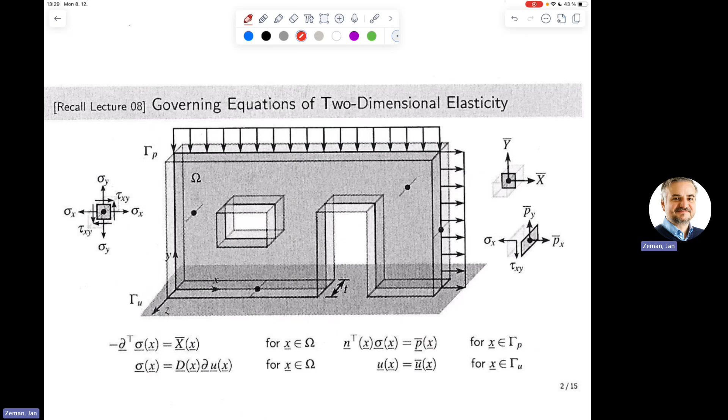Basically what Marek was trying to show you is how to get the governing equations of two-dimensional elasticity and treat it using the tricks we developed in 1D elasticity, for instance for stress elements. I will spend tons of time on that, just to make this distinction.

Basically you proceed by taking this set of governing equations, which, non-standardly I would say, I'm presenting separately, so we don't have a diagram. I will now distinguish two types of equations: one is the equations of equilibrium, and the other is the rest. This is because the equations of equilibrium are replaced by this principle of virtual work, whereas the rest is left untouched. So this is the first development.

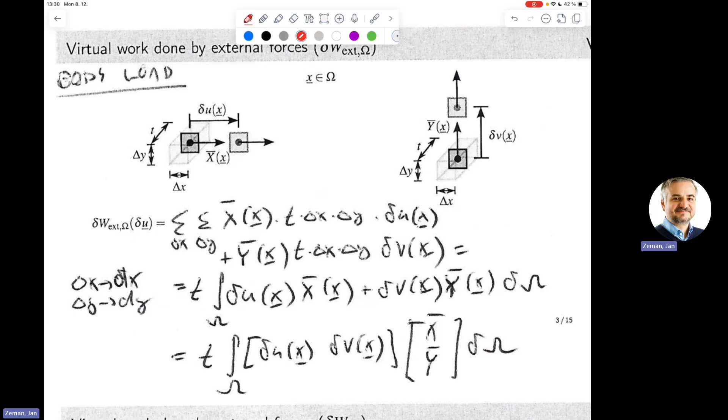Then Marek was trying to explain to you how this virtual work done by external forces looks like. What I prepared, and what we also try to explain, is that the procedure is always the same, because this is work. You always need to take your quantities of interest and convert them to something which has the units of work, which is force times displacement, or if I have rotary effects, as I will have for plates, this is moment times rotation. But in this version, force times displacement makes perfect sense.

So what I'm basically doing here is taking the distributed load and converting it into a resultant force, which is in Newtons, because this is the intensity of the distributed load, given in Newtons per cubic meter. I will multiply it by the corresponding volume with this representative section, which is delta x times delta y in the in-plane dimensions, multiplied by the thickness, which is assumed the same everywhere for simplicity but can be generalized. I need to multiply it by the displacement, in meters, and hence I get the work.

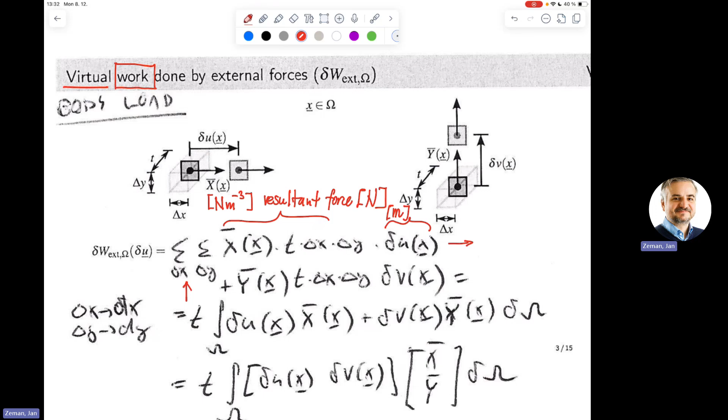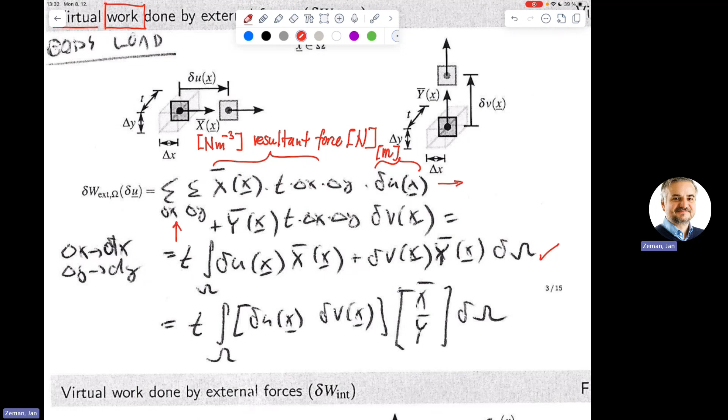Now this argument is relatively straightforward. This is for the x direction, this is for the y direction, and finally I need to sum the contribution of these elementary volumes, these elementary pieces together, which gives rise to integration. This is what Marek was showing, or I was also showing you on this slide. He also showed you how this can be reformulated using matrix notation, because this is something I have already denoted as delta U as a function of X transposed in the previous lecture. And here I also have this X over bar under bar as a function of X.

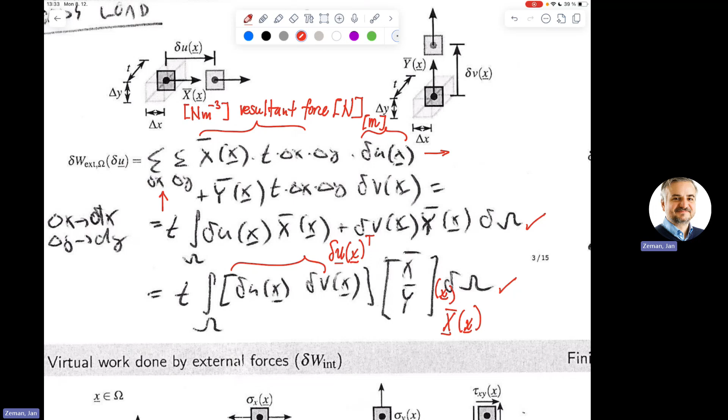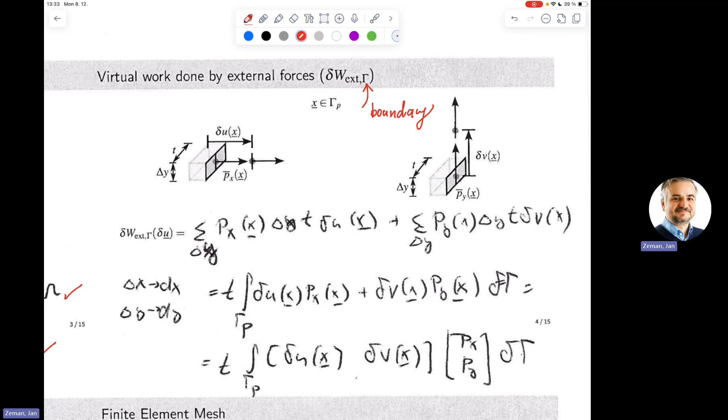Now one will see the same argument repeated over and over again, because now we are talking about the forces associated with the boundary. I will just do exactly the same recipe. The only difference is that these forces here are no longer volume forces, but surface forces, or in the jargon of elasticity, so-called tractions, and their intensity is given in Newtons per square meter, this highlighted square meter.

So this is the part of the boundary. This is how these quantities differ. Previously, these were body forces, hence associated with volume. Now these are surface forces, hence their intensity is associated with surface.

That's pretty much the end of the story, because now I will again take these tractions, which are assumed to be constantly distributed over this outer surface, since delta y is assumed very, very small. I will take the force here and multiply it by the corresponding surface on which it acts. I can denote this as delta fx, for instance, to make sure this gets converted to force, and I multiply by the corresponding displacement, in both the horizontal and vertical sense. So here again I can imagine this same elementary resultant making virtual work on the virtual vertical displacements of the boundary.

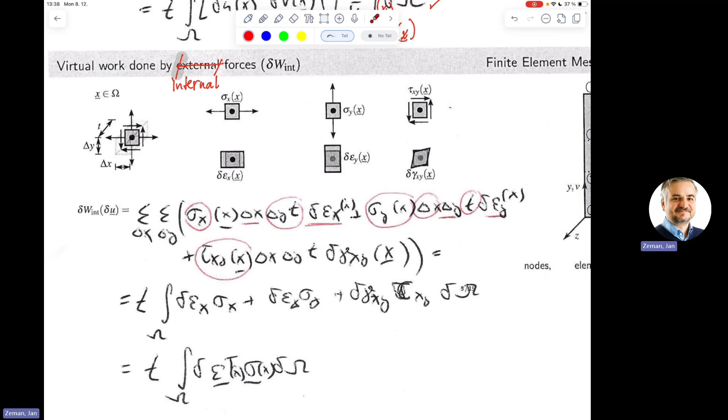And again, I just need to invoke exactly the same argument as before, or a similar one, because what I need to do here, for instance, is take this sigma x, convert it to the internal force, which means I need to multiply it by this cross-section, because this is the cross-section on which this stress eventually works. This is what is denoted here as this thickness, multiplied by delta y. So this is the first component.

So this is something like normal force in one-dimensional elasticity, specifically trying to explain in as much detail as possible. And actually this delta epsilon x times delta x corresponds to some change of displacement, roughly. So this is just this one-dimensional argument repeated there.

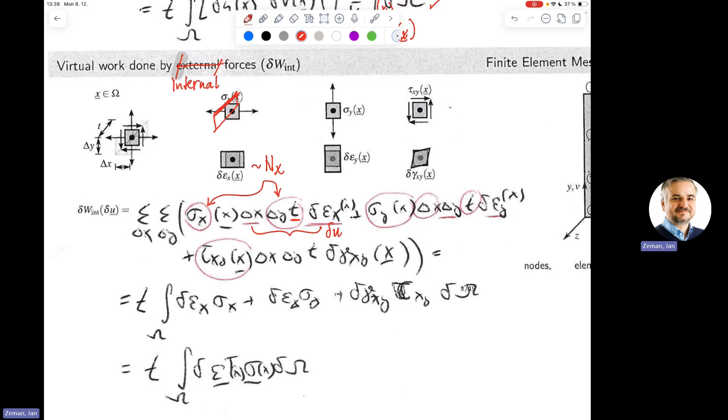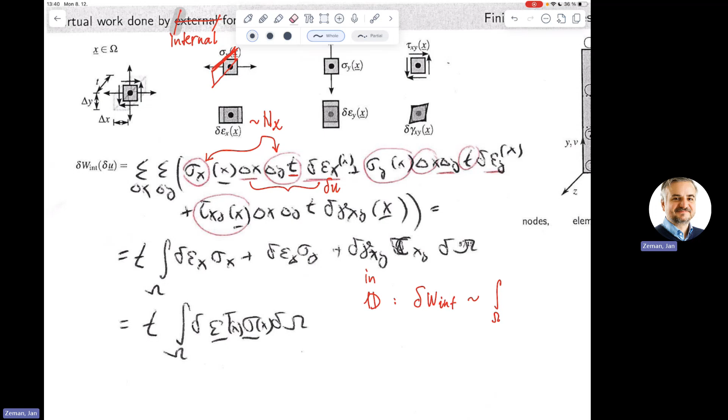So this is just the application of the claim that in 1D, the virtual work done by internal forces corresponds to an integral over the center line, where I have this virtual strain multiplying the normal force, dx. This holds for one-dimensional elasticity, and here I'm using this argument for this component of the normal stress, where it's just a one-to-one copy, except that I need to again take into account the cross-section on which this works.

If I just do it in the perpendicular direction here, this is what I get. So if you follow the same argument, it turns out that these two things change roles, but eventually, because you're multiplying things together, the order doesn't matter. So this is just the same example. And this one, by analogy, can be discussed in a slightly more involved way, but eventually goes to the very same expression.

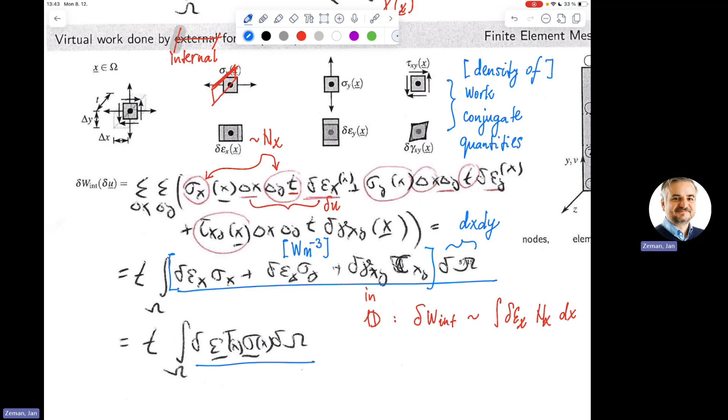And again, Marek was trying to show you that you can represent it using this compact notation, using the symbols from the previous slide. That was the next slide.

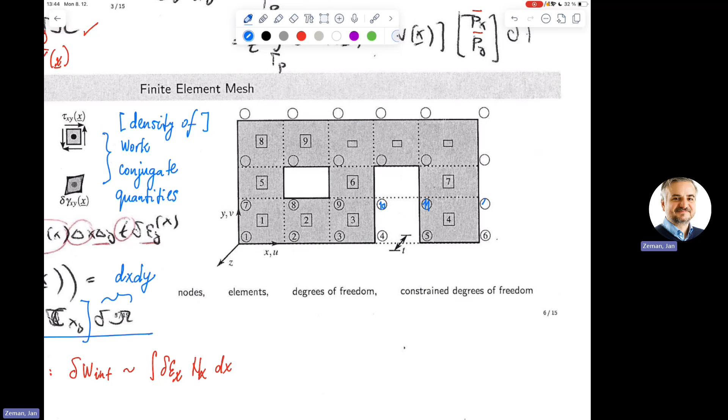Then this one is really something which goes in the direction I promised, because now I have my virtual work statement ready. So what I can do is take my structure, this load-bearing wall which I indicated, and what Marek was trying to show you is that if you count the numbers of your nodes and elements, what you find out is, if I zoom in, I have 4 rows of nodes and 6 columns. In this case, if I decompose the structure into smaller bits, these so-called finite elements, then I will have 24 nodes.

When it comes to counting, this is 10, 11, and 12. Degrees of freedom: each node has 2 degrees of freedom in plane, so this has 48 degrees of freedom, out of which some are constrained, because in that scheme I tried to give you, this was fixed.

So because nodes 1, 2, 3, 4, 5, and 6 are constrained, I do not need to determine the displacements of those - I know that from the very beginning. Of course, there's no free lunch on getting reactions there. The reactions which I identify with, for instance, to check our foundation, to check whether they can sustain this.

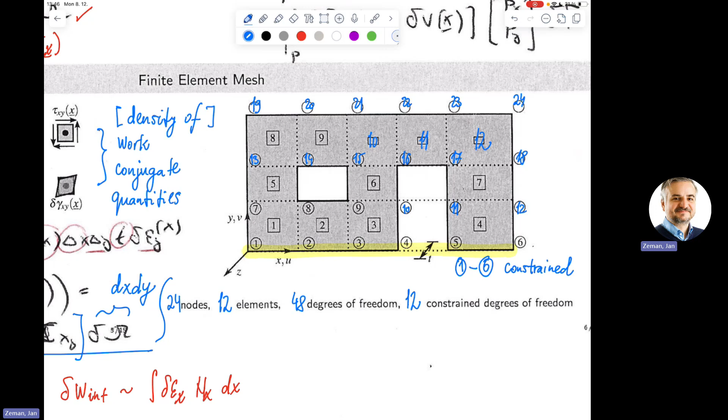So this is basically it. What this tells me is that if I'm able to treat this constituting element, this rectangle, with the same techniques as before, I can eventually see this as some kind of very generalized truss structure which has 24 nodes. And these elements serve somehow to actually determine the stiffness of that structure.

So that's basically it. If we are able to formulate all the matrices in the spirit of the displacement method, then this 2D elasticity can be converted to some 2D truss structure, if you would like to motivate it via this, and we know how to solve two-dimensional structures. We've done this semester 2 to 3 times, and last semester as well, so we know all the tricks of the trade. Again, this is not something which is super difficult.

So the question is why this method was not used before, and as you may guess, the answer is these numbers. Although this is a very rough discretization into so-called finite elements, it turns out you have 36 unknowns. Even for this very simple model of your structure, you need to solve a simultaneous system of 36 equations for 36 unknowns, and this is something no human can do. I believe this method was known before because people were very advanced in the pre-computer era, but it eventually resulted in something unsolvable. The thing which changed that was the invention of computers - they can solve 36 equations for 36 unknowns using well-established algorithms, and it costs you nothing.

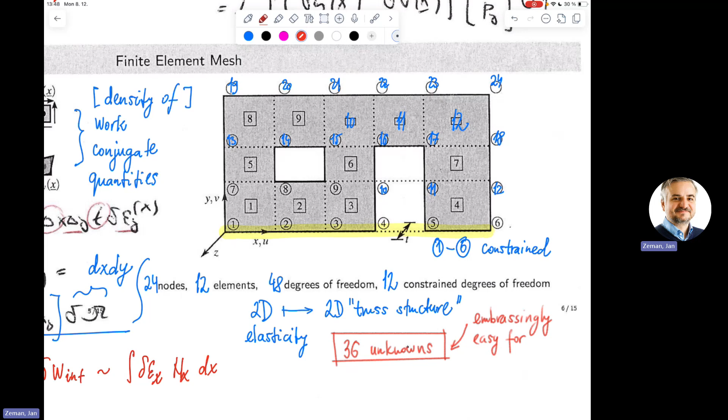So again, the reason I'm showing you all this is because we have computers at our disposal. This is something which is embarrassingly easy for a computer, but completely impossible for a human being.

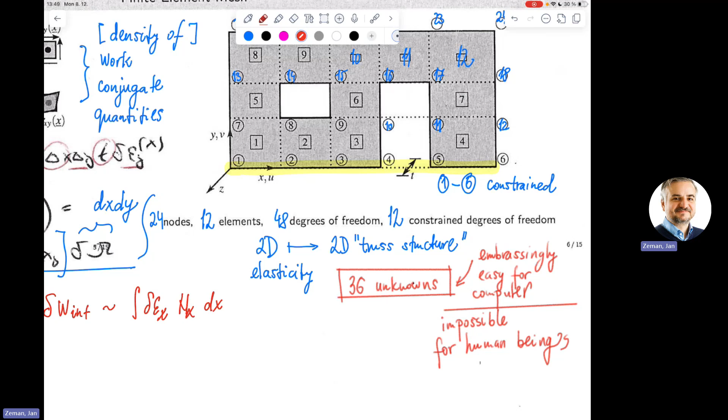So let's see how far this can be pushed with the modern recent development of artificial intelligence. Again, in this field, the invention of computers changed pretty much everything. It changed the focus of the methods from something analytical to something which, if you can convert to a system of linear equations, you can eventually use. And the tools of the trade and procedures of analysis are exactly the same as before.

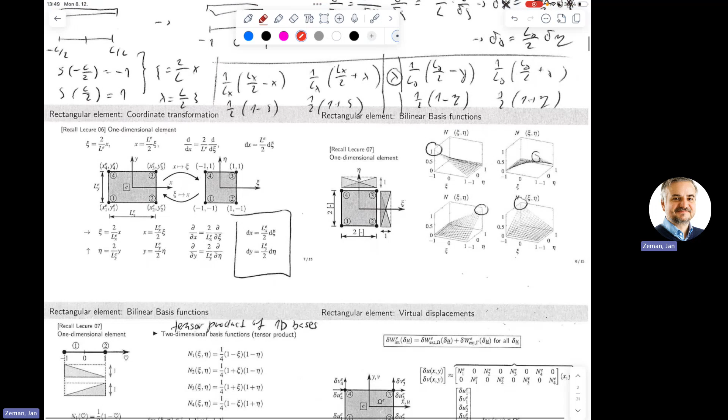Okay, so now what I need to do is evaluate these individual matrices. I need to know, if I would like to proceed exactly in the same way as I did for trusses, is get the stiffness matrix and get the rules how to transform distributed loads to nodes in order to assemble the final system equations. And once the system of equations is there, then I know exactly what to do. Of course, there is no free lunch.

The problem is that now I'm working with two-dimensional domains. I need to differentiate with two coordinates. I did my best to explain why this is so.

I also introduced one trick called Gauss integration, because when it comes to computing integrals, I told you last time that this is something I will never ever do analytically again. In all fairness, this can be done analytically at least to a certain extent, but the last part of this place is something that, at least 2 years ago, MATLAB was unable to do.

So to circumvent that, I need to be able to transform everything by this normalized interval, which in one-dimensional was just this one. But because I'm working in 2D, I also need to consider this perpendicular direction. So this is now my generalization of this one-dimensional interval. This is a two-dimensional interval, and I just need to be able to do the substitutions of variables.

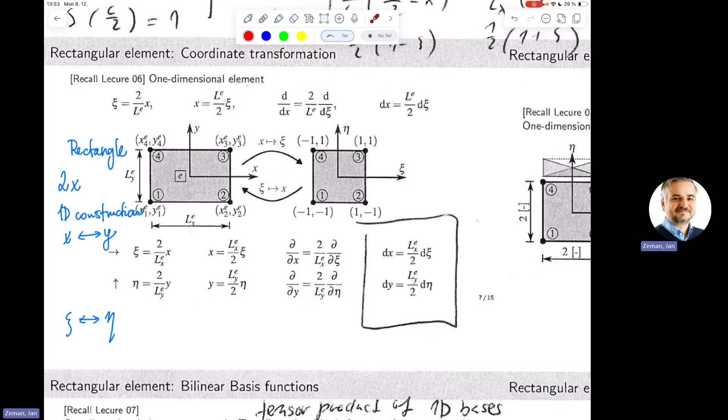So this is something which is 1D. This is something which is rotated 1D, which means that x is replaced by y, xi is replaced by eta, or any other symbol you wish. And again, because I have this square, which is always the case, by the way, the reference domain, then I can actually compute these basis functions as products of the one-dimensional ones.

So this is what I wanted to show here. This is again a recap of one-dimensional element development. This is exactly what I did in 1D. The only difference is that I'm saying that now this is an arbitrary coordinate.

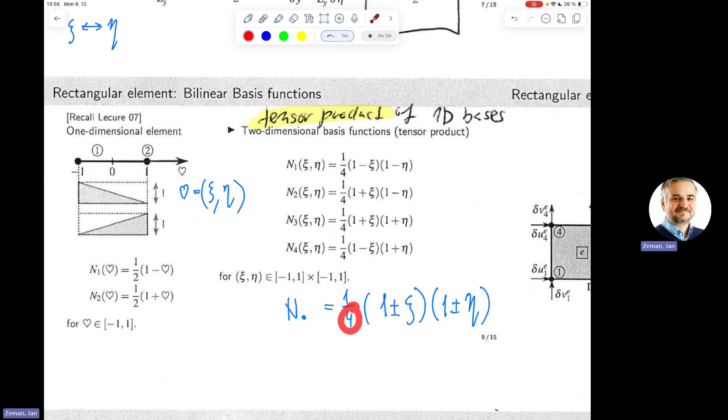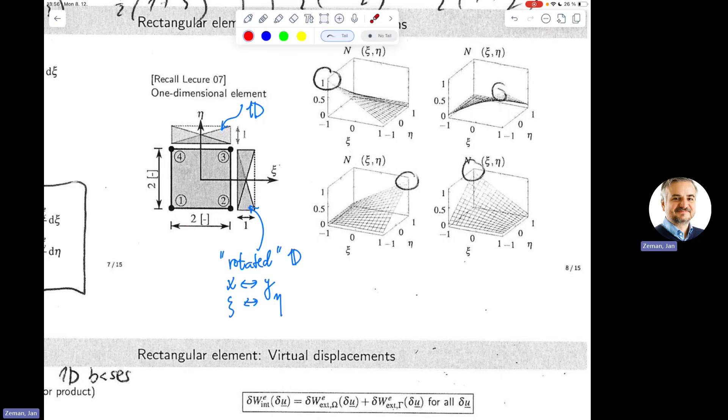This normalization factor of 1/4 is just to ensure that the basis functions attain the value of 1, as shown on this picture, which is still not perfect but much better than everything I presented so far. I never know how to rotate it in a way that's visible in all cases. This comes from the fact that Gauss quadrature is usually defined on an interval of dimension 2, so I just need to normalize, because we're basically doing this on a 2 by 2 square. But this is just a technicality.

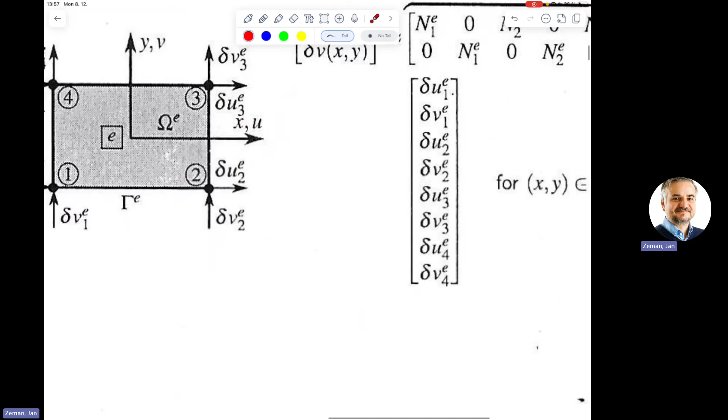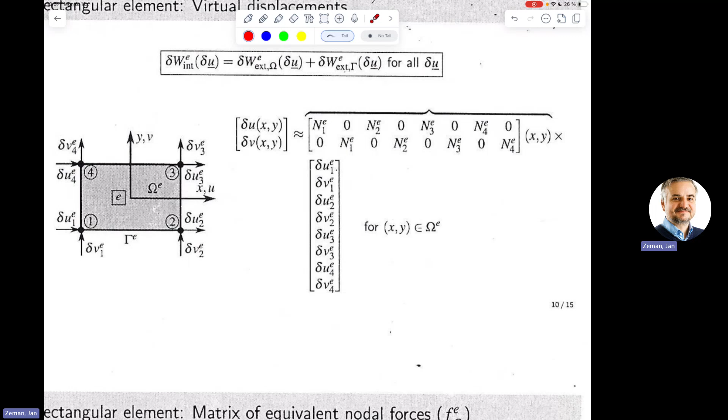So that's it. And now comes, depending on whether you've seen this before or not, what I'm trying to do is recall this principle of virtual work statement.

I'll write this, but only at the level of my element omega e. And I know that if I go through the procedure, from the term on the left-hand side I will get my stiffness matrix, whereas for the term on the right-hand side, I will get some vectors of equivalent forces.

This is what I did previously, but here the difference is that I have two types of distributed forces: ones distributed over the surface or boundary, and ones present in the body, like gravitational force. So this is something I need to distinguish, making two separate recipes.

But here I have two independent degrees of freedom which characterize this virtual displacement. So what I'm trying to do is express this virtual work done by internal and external forces, if I take one element within my structure and prescribe virtual displacements to its nodes.

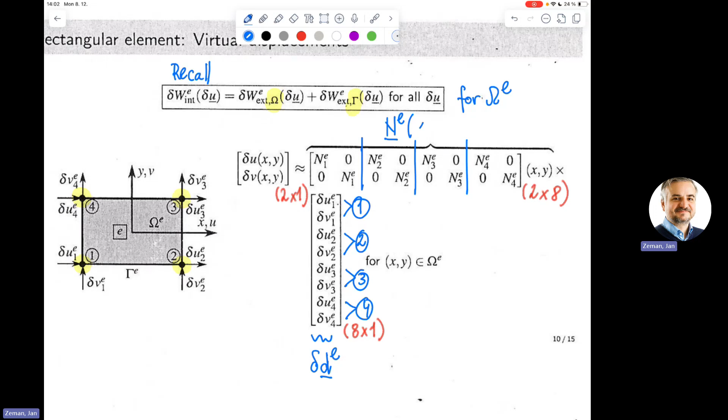In terms of compressed notation, this is the virtual work done by, these are the parameters of the virtual displacement - these eight numbers. This is denoted as the matrix of basis or shape functions, as Mark told you, and has this particular dimension. So my virtual displacement as a function of x and y is approximated by my matrix of basis functions, which depend on x and y, multiplying delta dE, where I'd like to highlight that these are data at the vertices of my element, so this is constant.

So this is something which is in R, this is something which is a column which is 8 by 1. So this is constant.

So if something is constant, this is something which is actually unaffected by integration, or very easy to integrate, so this is something which is quite good.

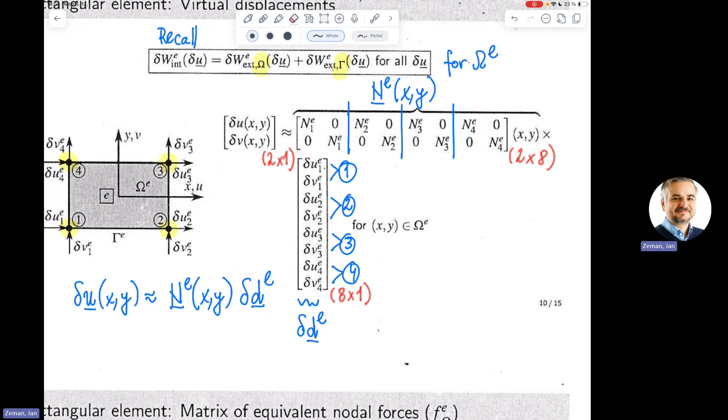Also, some people explain this finite element method as not really taking these elementary bits, but taking the elements of finite size. In my opinion, this terminology is not natural, because it was improperly translated. Actually, in English, it's different. But anyway, sorry, I'm talking about things I shouldn't be.

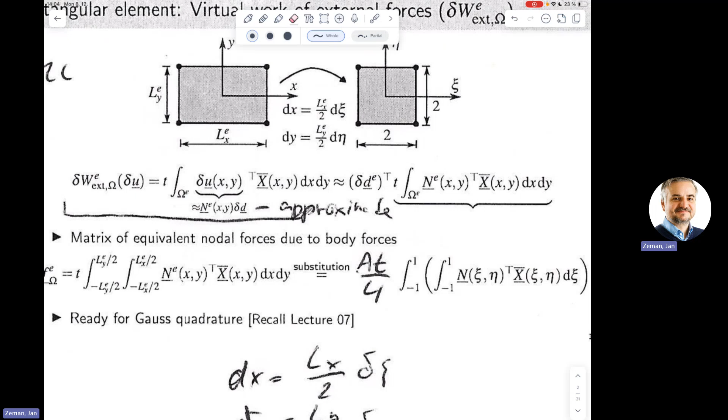So now, here is basically the argument. So now if I look at my element and try to compute what is the work done by external forces, by body forces in particular, I know from the previous one that this is given by this expression, but now I'm just integrating things only over my element, not over some arbitrary body, but my very specific element.

And if I do this transformation to the coordinate system in the dimensionless coordinates, this is actually something which is completely element independent. So the mental picture then is that I have these multiple elements within my structure, and they're all mapped to one finite element, 2 by 2. And this is what I believe is the proper interpretation of the finite element method.

So this is the finite element, and then by these substitution formulas and coordinate transformation formulas, just specializing for particular elements in your basic setup.

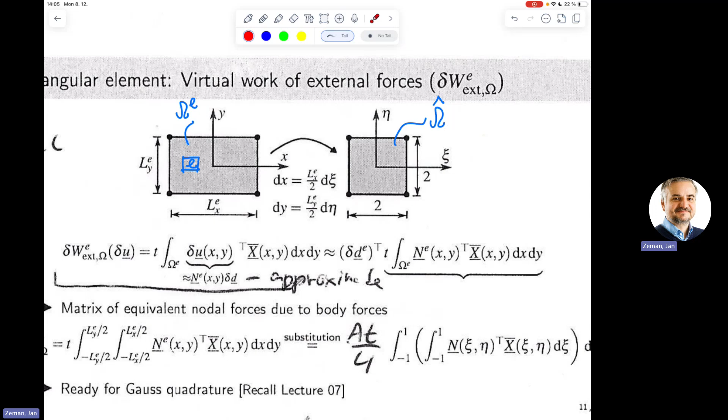So now what I will do is that on the previous slide I have justified that instead of virtual displacement, I can substitute the virtual displacement by this expression, where I forgot this E superscript.

And then I just use the rule which says that if I have a product with two matrices and transpose them, that actually everything gets transposed. So I know that if I just do the substitution, then this needs to be transposed, meaning that I will get this term, that term, this term, that term.

This thickness is just taken out of the argument because this is constant in the same way as the displacement. And if I do that in this way, then I have expressed my work done by external forces within this approximation.

As a matrix multiplication of this delta d E, which is the virtual displacement at nodes, times some matrix. And this matrix, as I know from the 1D case, is my matrix of equivalent nodal forces.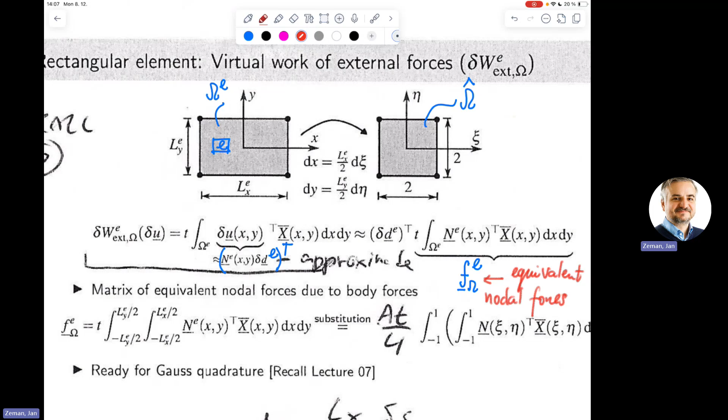But for that reason, I need to transform it to this reference domain, so to this omega hat. So what I will eventually get is that because of the substitution formula, this gives rise to Lx times Ly over 4, where this A times t is the volume of my element, so this V is my volume.

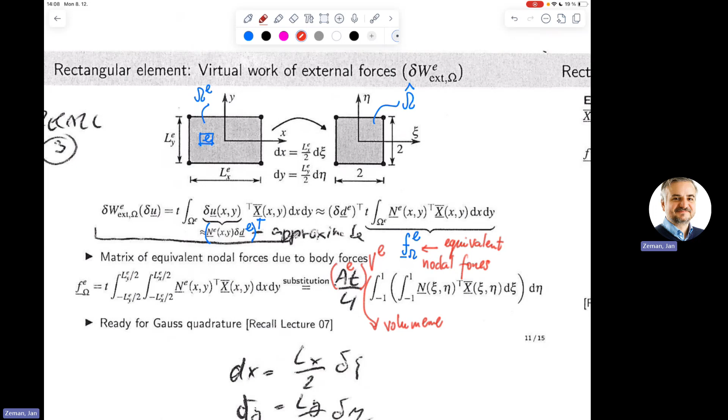And this is the remaining part, which is now to be integrated, but it's now transformed to this minus 1 to 1 integral twice, so now I can employ the Gauss quadrature.

And just as an illustration of how this works, if I assume, for instance, that the intensity of body loads is constant everywhere, then I can just run some analysis, documented here, to find out that actually this depends on the zeroth polynomial of xi and eta.

This is at most of the first term. So if you recall how this Gauss formula worked, if I'm supposed to be... here actually I need to do it twice, so I need to integrate with respect to both coordinates.

Because there is no summation, I'm just evaluating this at one point, so I can say that the only thing I need to do is take this quantity and substitute it in. I just need to be careful because I also have these integration weights, which are equal to 2 and 2, and hence this 4 vanishes.

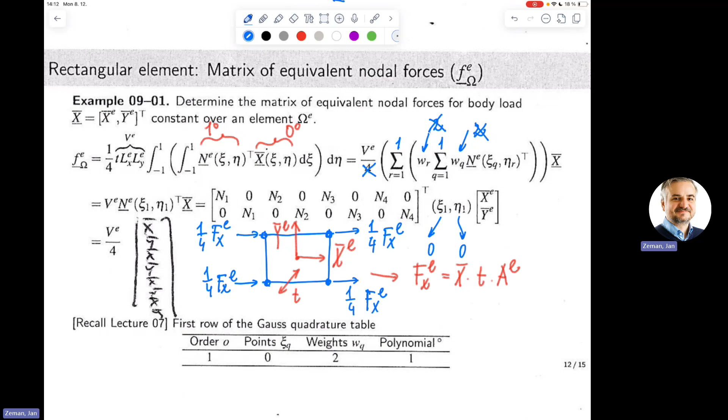Now there is this argument of the virtual work done by external forces, which was not really prepared well from my side, but after preparing these handouts, I realized that the most straightforward argument, demonstrated by this computation, is that if I'm locating the edges of my structure, I'm actually exactly recovering these 1D basis functions.

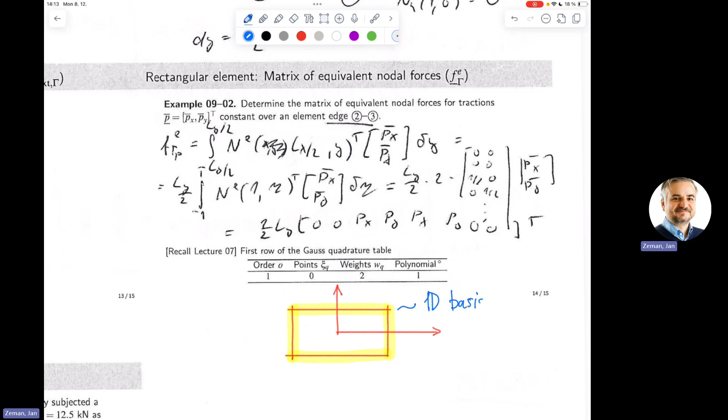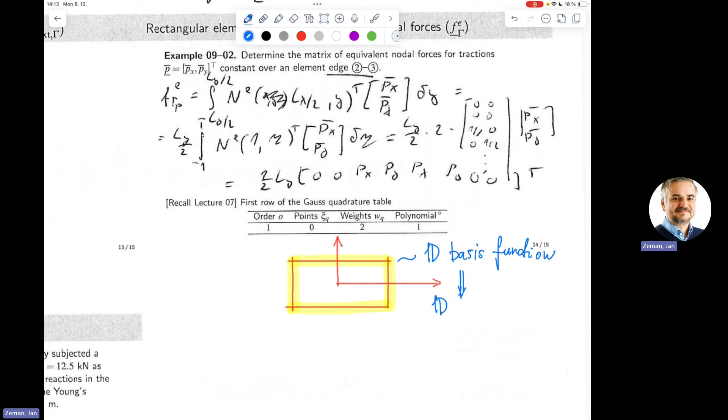I can just employ the 1D formula. And if you recall, this 1D formula is just the data stored in these tables of end forces, just with the minus sign, because these are nodal forces, equivalent nodal forces, so they appear on the right-hand side.

So here, for instance, if over this edge you have some load of constant intensity, which has two potential directions, horizontal and vertical, you take the edge length, take the resultant, which is 1/2 here, and distribute it 1/2, 1/2.

If you have this triangular distribution, you take this one-third distribution, and if you have something here, you can just decompose it into constant and linear parts, as we did last semester. So these hand calculations for the nodal forces are something you can do.

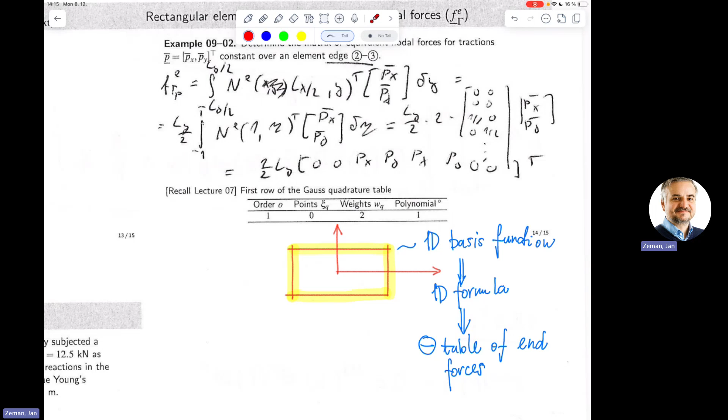This is something I already know from structural mechanics 3. I just need to be careful about which sign I use, okay?

And this is, at least from what Mark explained to me, the part where he finished his presentation. So it took me 1 hour to go over that, for a completely realistic estimate of how far it can go.

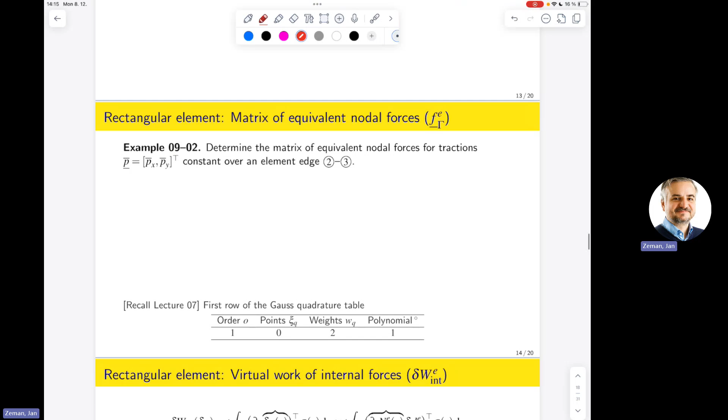Okay, so now I will proceed exactly at the point at which Mark stopped, which is here. And I'll try to convince you that we can learn a lot of stuff.

So what I'm required to do now is, if I just do the check, I have this delta W ext of my element, which I expressed as a matrix multiplication. So I have this delta dE, which are the virtual displacements of my element.

And I have already identified that I have two nodal forces associated with nodes: one from distributed loads, computed in a natural way, and then contributions from the edges of my element, for this gamma, which I can explicitly evaluate using this one-dimensional nodal force table. So this is what I already know, and I have it.

So the final bit which we make is the internal work done by internal forces. Sorry.

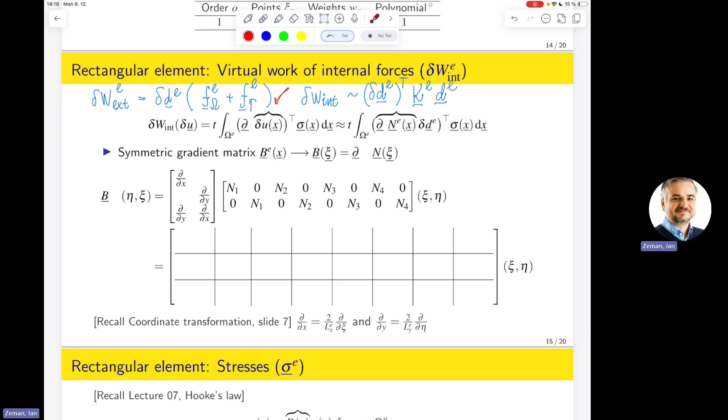So now, if you have a look at the previous line of argument, then I did my best previously to see or say that what I need to do is to take the virtual strains within my element and multiply them with stresses in a way that will match the corresponding stress-strain principle. So as it goes from this part, I know exactly what I am allowed to do.

So I know from the previous developments that this bit can be replaced by taking that matrix of basis functions of my element as a function of x and y, multiplying the virtual displacements of my element. So this is the substitution which I know already from the arguments.

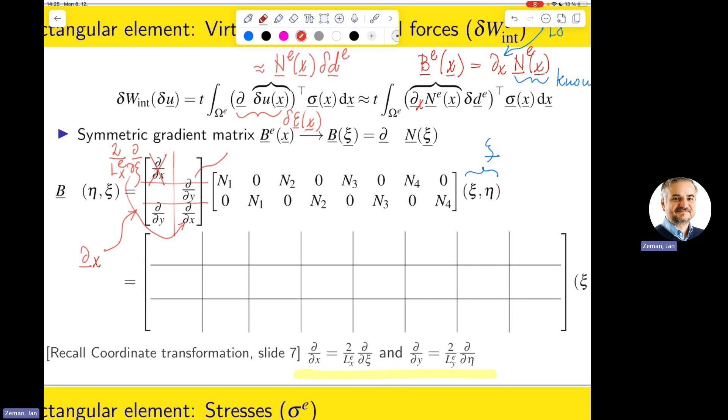And for every partial with respect to y, I actually need to substitute according to this rule: 2 over Ly of element E partial with respect to eta. So this is the first entry, and this is the second entry. Okay? So now depending on your aesthetics...

At least to save a bit of writing, I will factor this 2 out of the matrix, and now I will just imagine that I'm doing this differentiation. So now the empty spaces are occupied by 0, and if I'm interested in this entry here, then the only thing which I need to do is multiply this row with that column.

So if you just do that, it turns out that I will get 1 over Lx of element E partial, with respect to the corresponding dimensions. If you do the multiplication of this type here, horizontal, vertical, you will find out that actually the zeros alternate, which means there will be no contribution.

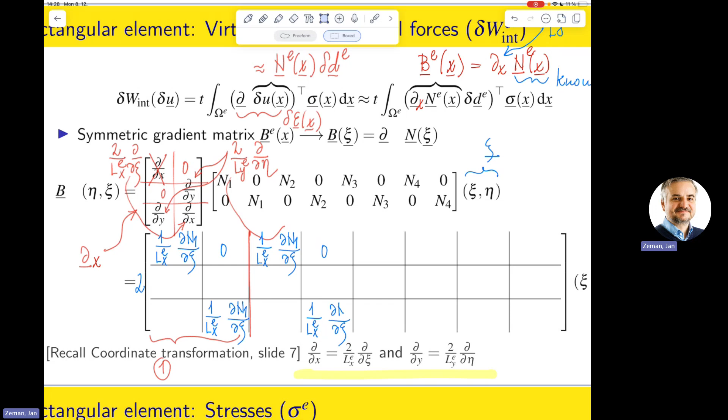So this is something which is actually specific about node 1. And if I now would like to extrapolate this to the corresponding nodes, sorry for cheating a bit, but now I would like to extrapolate it to the corresponding nodes. So basically the only thing which I need to do is change this 1 to 2, right?

If you just imagine the way the data were collected together, I really made the best effort to separate these nodes from each other, and hence I can imagine that I'm just doing this multiplication to each of these individual slices of the matrix.

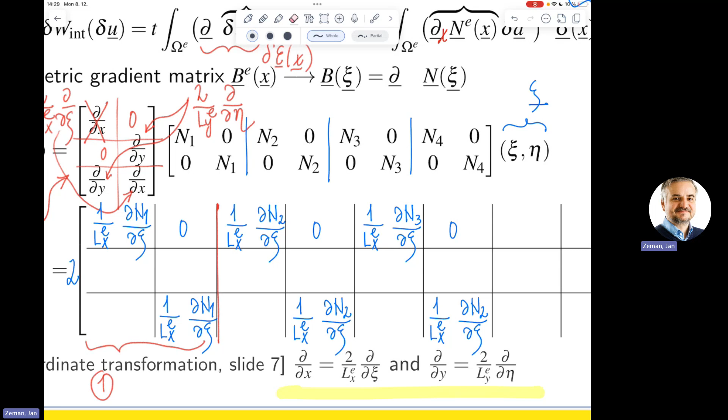So now I will just repeat the same argument again. I will just duplicate this, change 2 to 3, same here. And now I just need to repeat it for the final fourth node. So this is what I got.

Okay. And by that I actually treated all partials with respect to x. Now I will need to do exactly the same thing with the partials which are with respect to y.

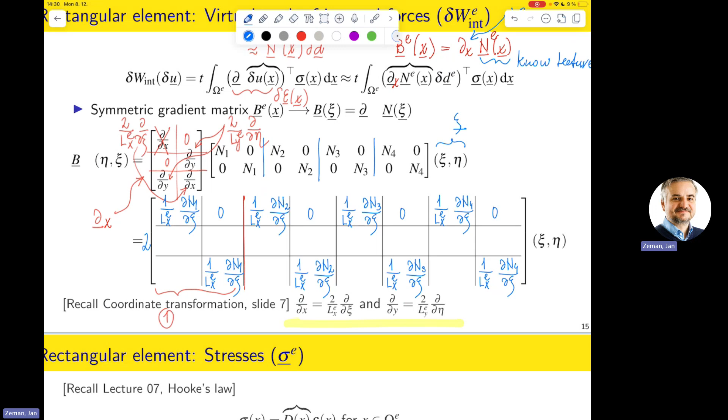So now if I imagine that I'm doing this second row, first column calculation, I will find out that this is 0. And here I will have eventually 1 over the edge length, but in the y direction. Here I will have my function n1 differentiated with respect to the second dimensionless coordinate.

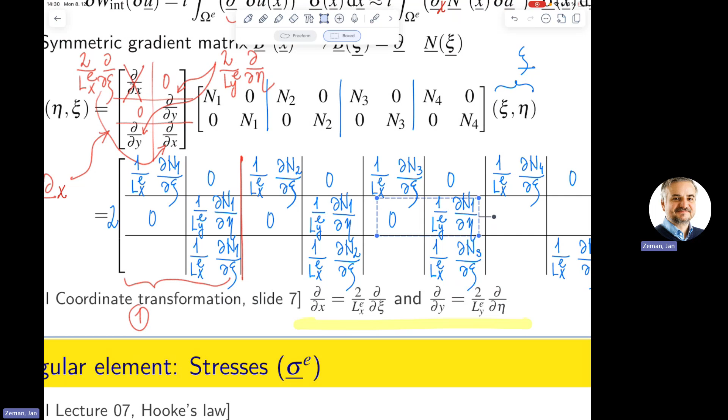And this is pretty much the argument which is repeated over the remaining entries.

And finally, again, if I just imagine what would happen if I were to do the partial derivative with respect to y, so this third row times first column, I will see that eventually here I have exactly the same thing here.

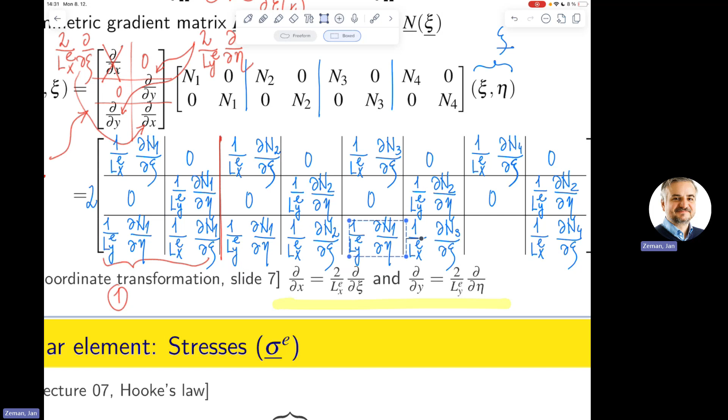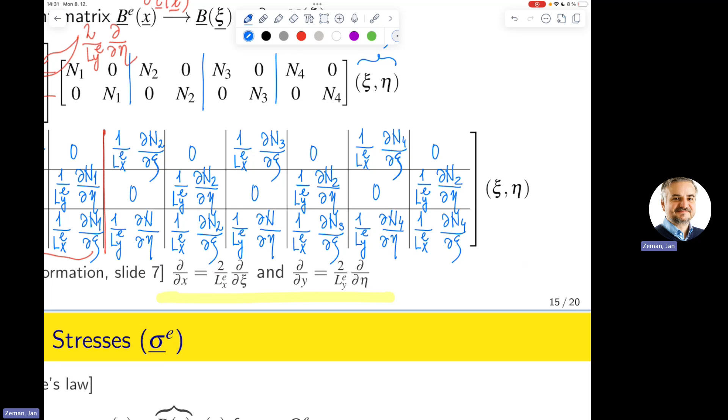So this one. So again, I just need to distribute it accordingly to the remaining places in my development. So this is 4, 3, 2, and 1.

So it was a bit lengthy. I'm very much aware of that. My main intention was just to show to you that it's not complicated. It is just tedious.

Have everything actually done on the nodal basis. So this multiplication, because of this very special structure, actually can be done node by node. I will get these expressions and repeat it for x. So this is how I should have done it here.

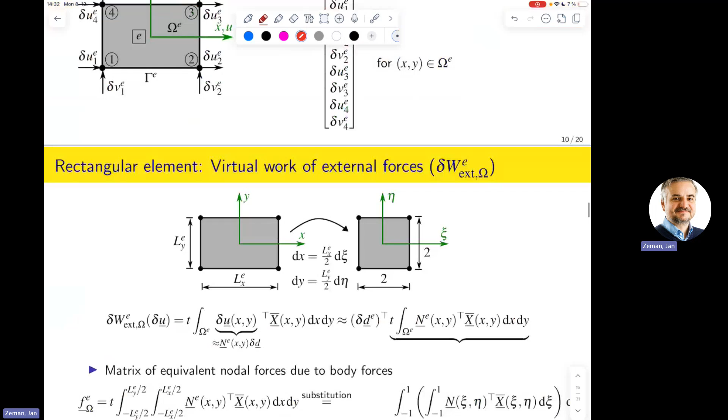And then, if you just have a look here, these basis functions are very easy. So if I do partial derivative with respect to x and y, what I will eventually get are just some constants and individual entries which are linear in one coordinate or another, but never simultaneous.

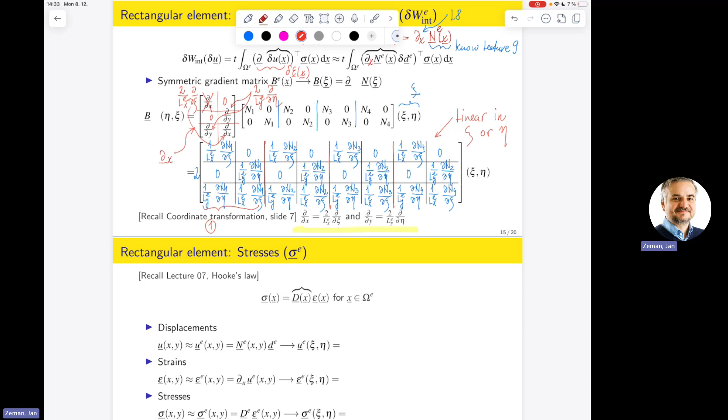Which is different from how the functions look like for the displacement, because then you have terms which actually contain the product of these two coordinates, x and y, or xi and eta, and hence these are so-called bilinear functions, but these are just linear functions. Okay? So this is something I can precompute, store in the code, and then I just need to finish the rest of the argument.

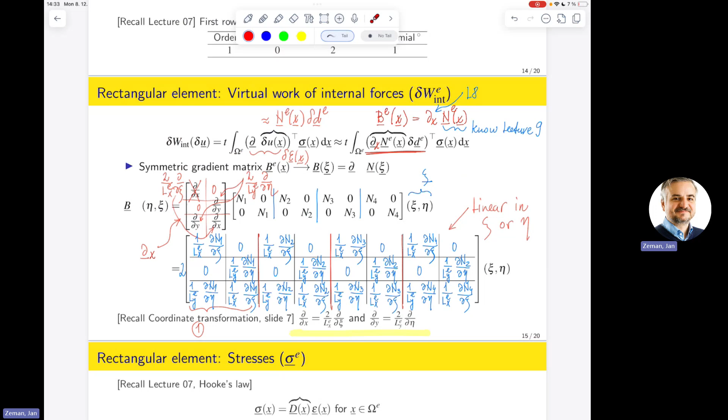So I now know exactly what I can substitute in here, because I have treated this B matrix. And sorry, the last comment I wanted to make but didn't, is that eventually this gives me this B matrix, but now expressed in parametric coordinates. But because these derivatives, when scaled to the reference domain, depend on the physical dimensions of the element, this B matrix is dependent on the element. Just for the shape functions for this n, I got something completely generic. Here, to determine the derivatives in physical space, I need to know at least my dimensions, and this is what makes it dependent on the elements.

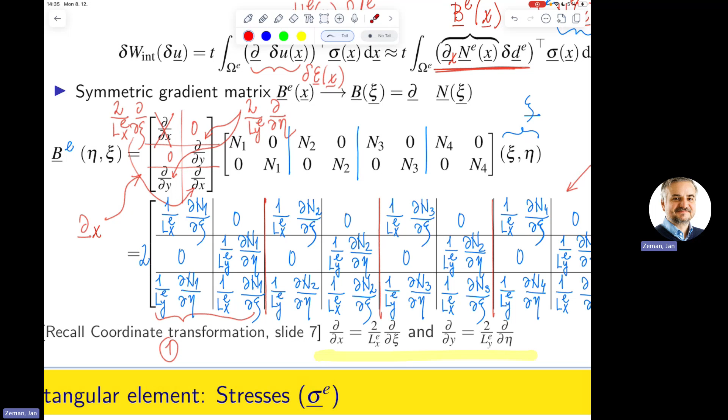So this is the maximum it can reach.

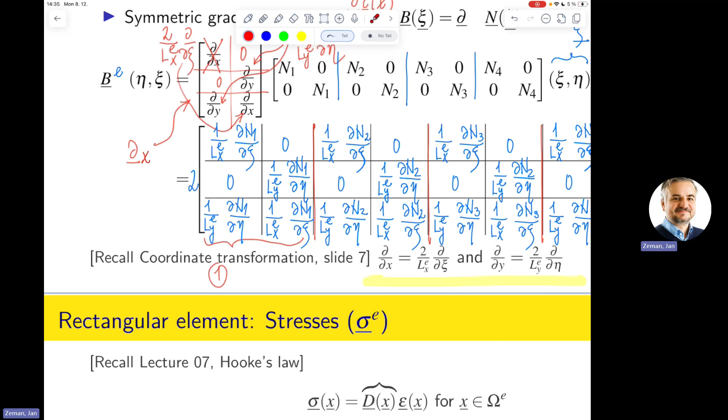Okay, so now, just to finish the argument, I need to explain how to evaluate these stresses based on all the assumptions I made. If you have a look at the previous lecture, lecture 7, I ran a lengthy argument, with some typos, to show that the relation between stresses and strains can be written for two-dimensional elasticity in terms of this elastic stiffness matrix. I will assume that this is constant per element.

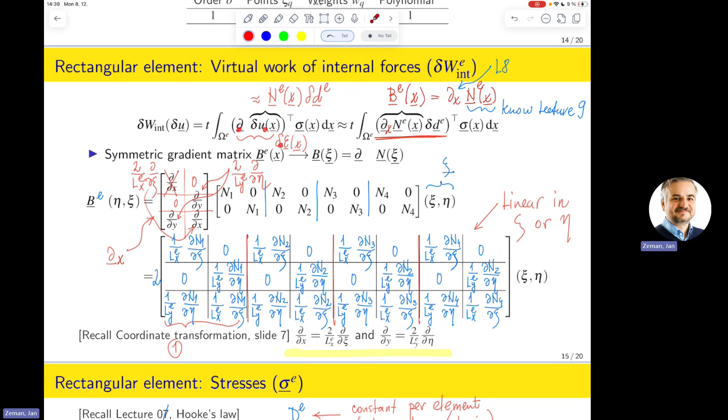In order to get this expression in terms of strains, the only thing I need to do is differentiate with respect to x, exactly as I did before. Sorry, here I forgot to add that this is the derivative with respect to x - so this is what I have here. However, I know I need to perform this differentiation in the reference domain, because this is where I will eventually compute my integral.

This is what I know from 1D. So it turns out I will do this derivative with respect to this xi coordinate. And again, because of this coordinate transformation, this derivative becomes dependent on the length, on the dimensions of my element.

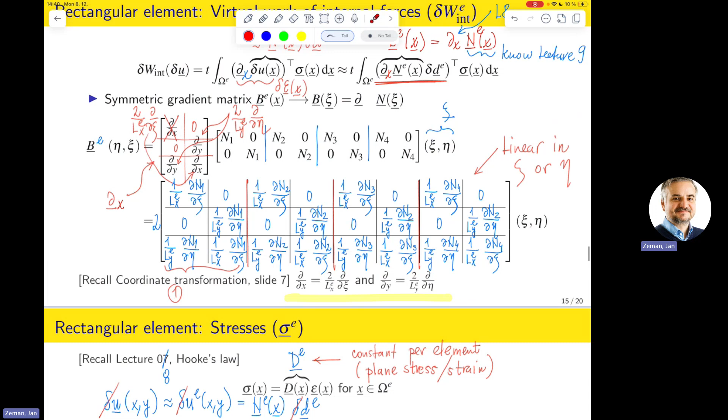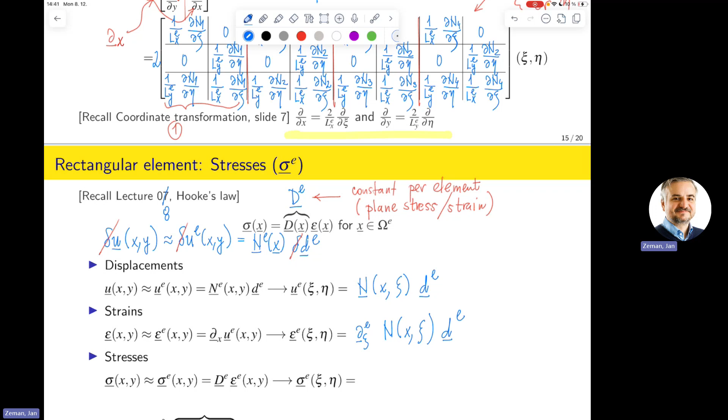If I now take this previous expression - sorry, my son is calling - I'm taking this multiplication, or the differentiation, to something previously expressed. I get here this B matrix of element E, but in the parametric domain. So instead of x and y, I have it dependent on xi and eta, and I need to multiply it by the nodal displacement.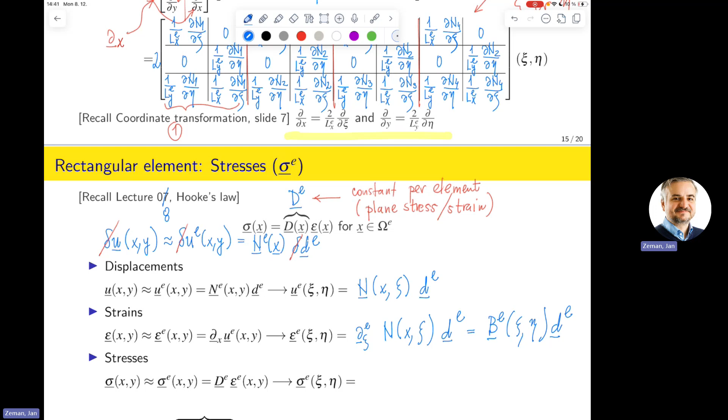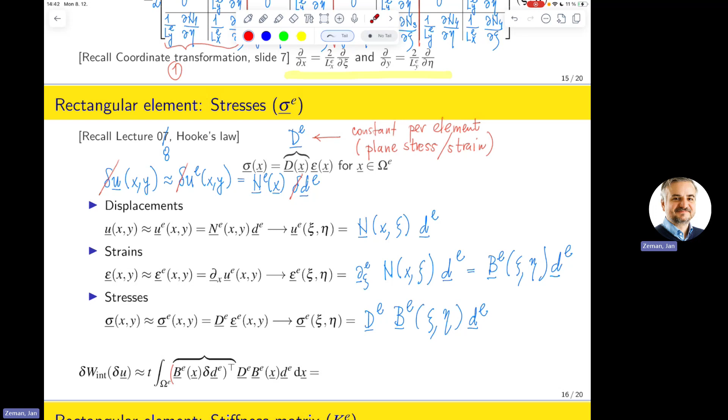And finally, this is what I'm trying to express. So I am trying to compute the work done by internal forces. And I'm already over time.

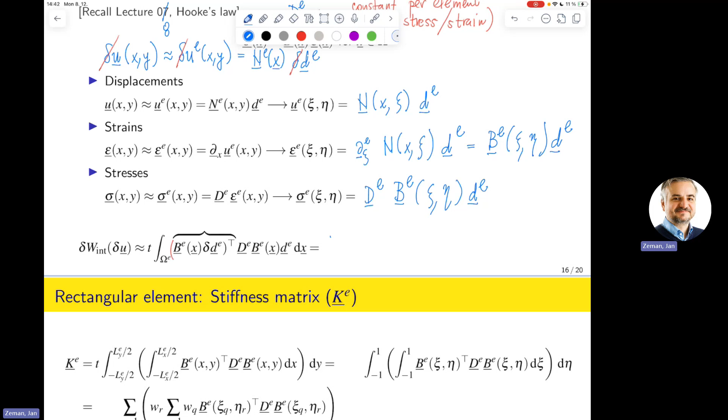Okay, good. So now I will just do the substitution. Because I have the product of these two matrices, and I have this transposition exactly because of the same argument as before, I can write this in this manner. And now I will just expand it.

I will write it in a very specific order because I already know what I would like to do. I will write this first because I would like to see it first in this expression for the stiffness matrix. Then I will multiply this by this B, E as a function of X transpose, multiplied by this DE, which is constant, but there is no way to get it out of the integral because these are not numbers, but this 3 by 3 matrix of material stiffness.

And I have this BE, which potentially depends on X. And here I will write this DE, which is external to the expression. The reason why I'm doing that is that I will pre-integrate this piece over my element in order to get my element stiffness matrix.

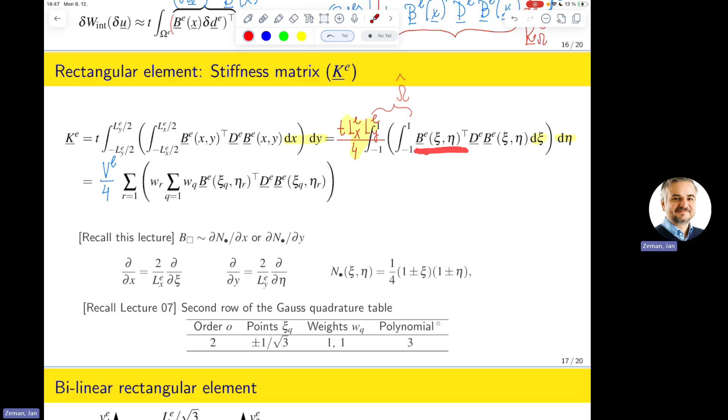So this is the final decision which I need to make. If you recall, I said previously that this B is linear in x or in the dimensionless coordinates. So this actually implies that this can be taken as the first order polynomial in the dimensionless coordinates.

But then logically this is also a first order polynomial in those two coordinates. Again, this is just repetition of the argument which says that these derivatives, which appear in this B matrix in the physical space, can be substituted with the ones which I'm eventually using. But I must account for this change of size, or Jacobian transformation. This is just to remind you that if I do this differentiation, I really get this result in place. So it turns out that if I just do the product of two linear functions, I'm eventually getting a second order polynomial in xi and eta.

So I'm integrating in two directions, but in all cases, the function contains these xi's and etas in the second power. If you just do the algebra, you will see it.

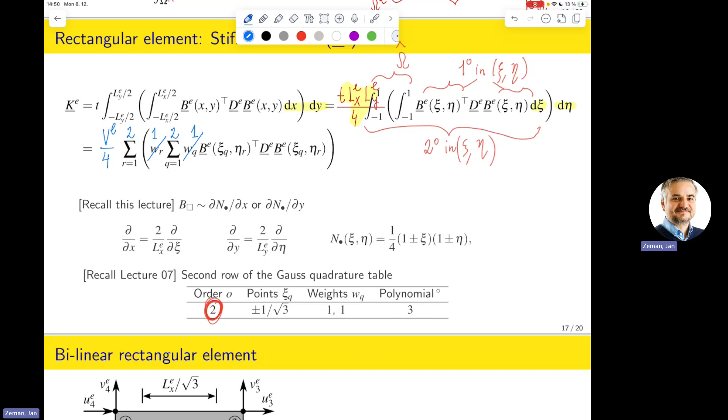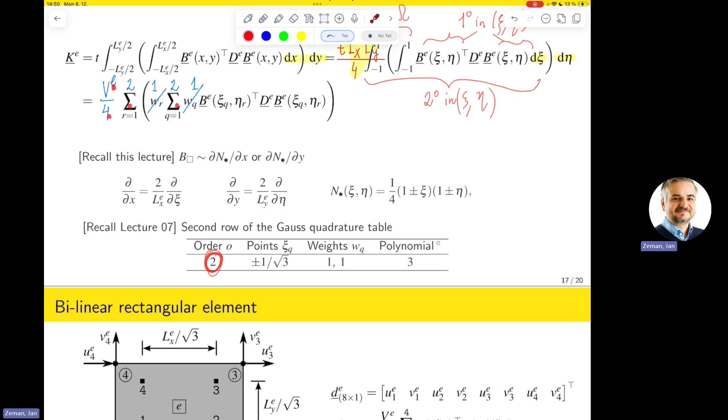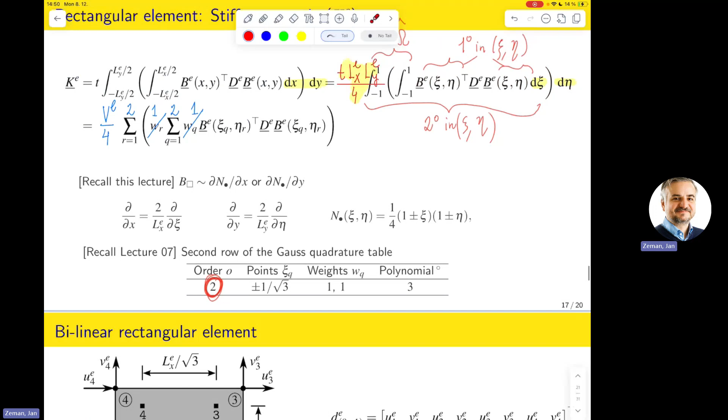So what I will get as a result eventually is the volume of my element divided by 4, times this double sum of B transpose DB. So if I just summarize that in the final slide, I can organize my points which occur in this double sum in here.

I can organize them into 4 so-called integration points. They are located at somewhat exotic locations. They are just spread over square root of 3 apart. This is because of this Gauss quadrature.

And it turns out the only thing which I need to do to get my element stiffness matrix exactly is to evaluate these B's in these 4 points, either one by one or separately and then sum the result. In each Gauss point, or integration point, perform this integration, and once I have the sum done, then I need to multiply by the Jacobian scale.

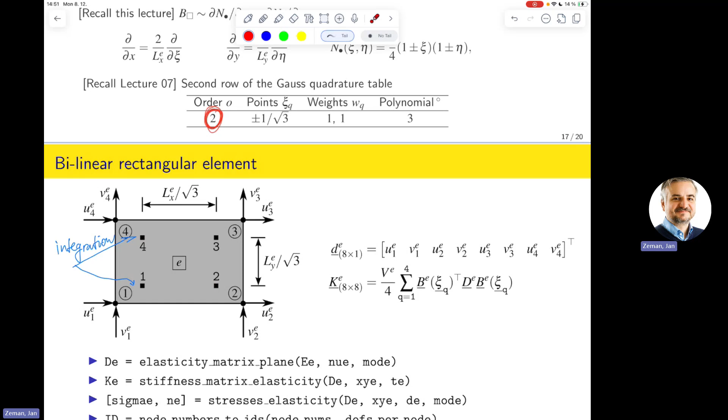And this pretty much closes the story because again I have this tabular computation to get my nodal forces, and I have this formula which I cannot evaluate explicitly because it's too long.

But I can actually represent it by a function in here, which just takes as input this D matrix, the geometry of my element, and the thickness in the out-of-plane dimension, and it will return this quantity to me. It will just do the sum over 4 indices and contract with this D matrix. So this is one extra thing which appears in that updated code base.

Then also, just to save some writing for you and also for me, I prepared and uploaded a new function called elasticity matrix plane, which gives you this matrix whether you are in plane stress or plane strain.

And the final one is that you will pass the displacements to that function, and it will provide you with the stress state at the center of the element, just by running the formulas which I showed before.

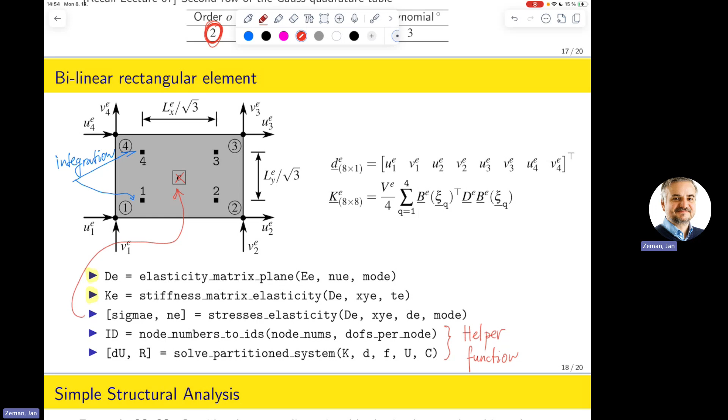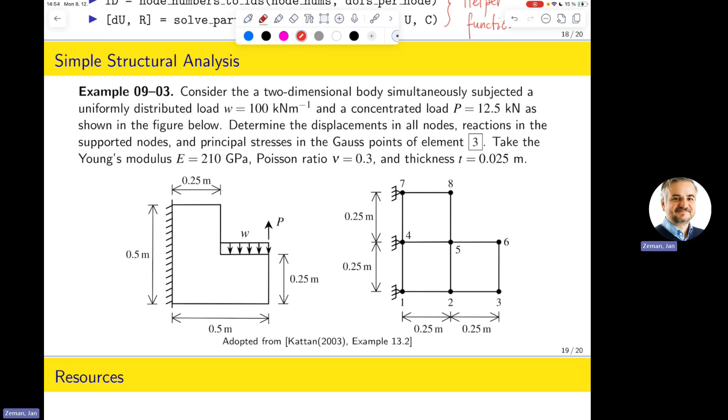Okay, so I was maybe behind the original plan, but this is something I wish to transfer to the problem session on Wednesday, so we will just go over this simple example and show how this is implemented in MATLAB.

But trust me, if you just have a look at it, there is almost no difference between doing two-dimensional elasticity calculations and truss or frame problems. So I will just show you how the logic works.

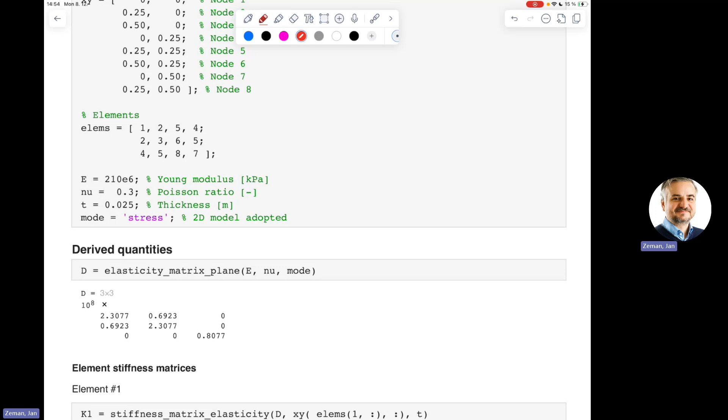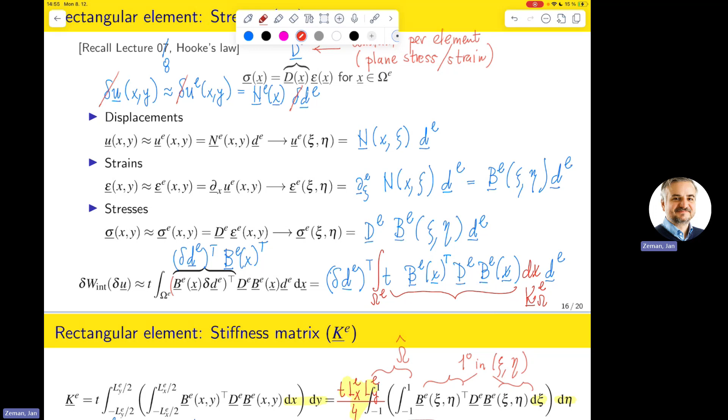There are also these helper functions to make our life easier, and we will go over this code. Then I will also show you how the final work of this course looks like, and hopefully we will also start some introduction to plates and their finite element treatment.